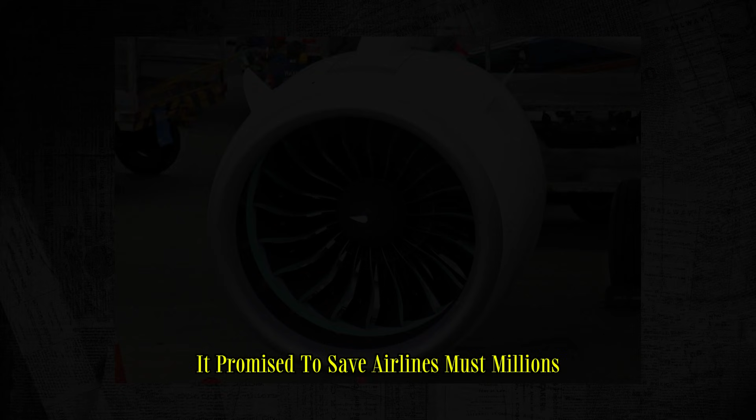What they came up with was brilliant, a revolutionary design called the Geared Turbofan. It promised to save airlines millions, cut emissions dramatically, and usher in a new era of quiet, efficient flight. They called it the PW1000G, and it represented a $10 billion bet on the future of aviation.

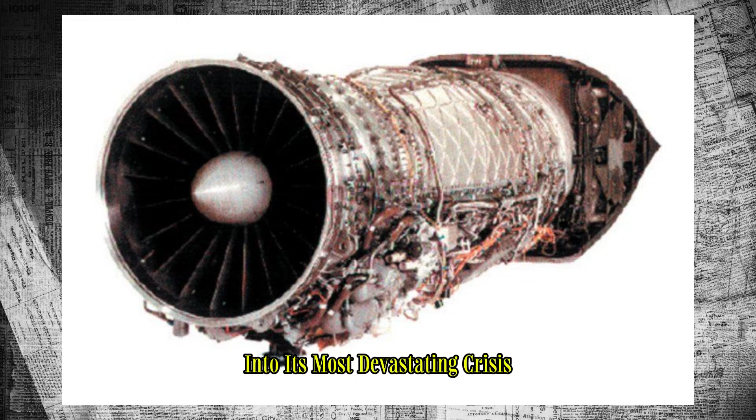But hidden within this engineering marvel was a microscopic flaw, a contamination so small you could barely see it, yet powerful enough to ground hundreds of aircraft, push airlines into bankruptcy, and turn Pratt and Whitney's greatest triumph into its most devastating crisis. To understand how everything went so catastrophically wrong, we need to go back to where it all began.

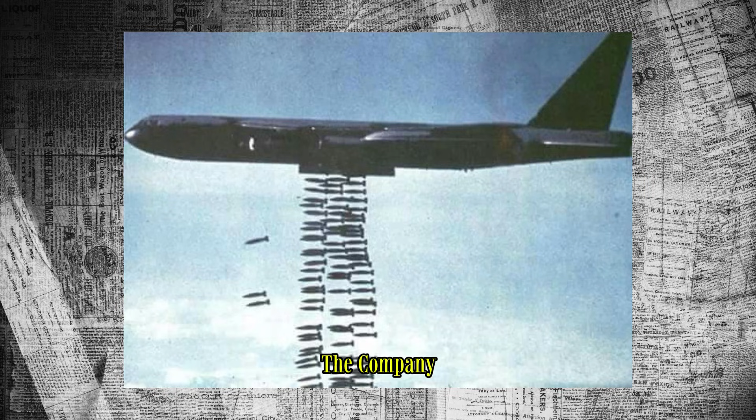By the early 2000s, Pratt and Whitney was facing an existential crisis. The company that had once powered half the aircraft in World War II, that had created the legendary J-57 engine for the B-52 bomber, and the commercial jets that started the jet age, was watching its market share erode year by year.

Airlines were choosing engines from CFM International, a joint venture between General Electric and France's Safran. Their CFM56 engine had become the workhorse of commercial aviation, powering thousands of Boeing 737s and Airbus A320 aircraft. Pratt and Whitney desperately needed to innovate, but jet engine technology had reached a plateau.

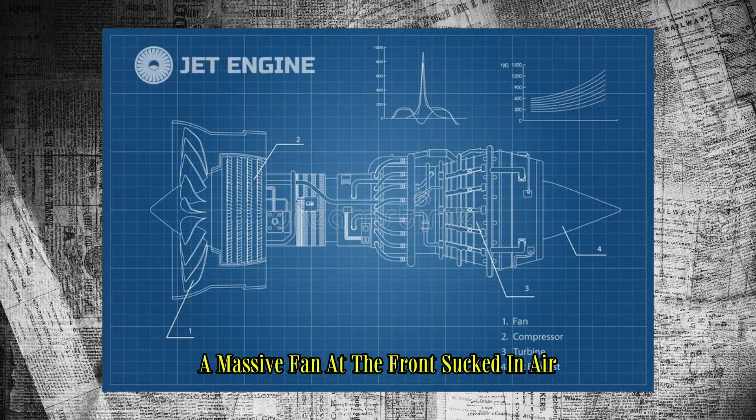Conventional turbofans all worked the same way. A massive fan at the front sucked in air, most of which bypassed the engine core to provide thrust, while a smaller portion went through the compressor, combustion chamber, and turbine.

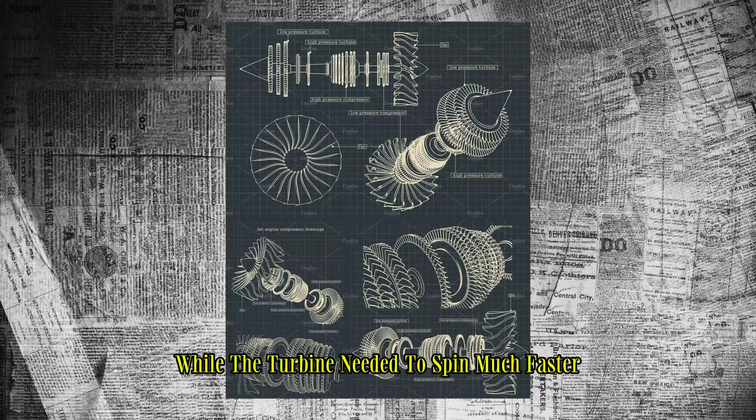The problem was physics. In a traditional turbofan, a single shaft connected the fan to the low-pressure turbine, forcing them to spin at the same speed. But here's the catch: the fan worked most efficiently at lower speeds, while the turbine needed to spin much faster. Engineers were trapped in a compromise, unable to optimize both components simultaneously.

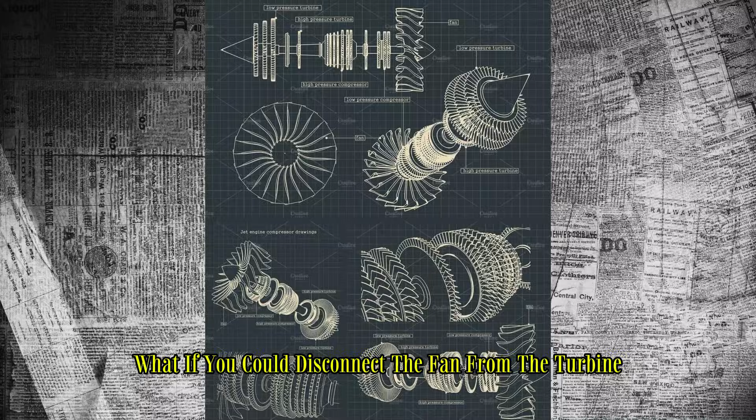Pratt and Whitney's solution was audacious. What if you could disconnect the fan from the turbine using a gearbox, allowing each to spin at its optimal speed? The concept wasn't entirely new. Small business jet engines had used these geared fans for decades, but no one had ever successfully scaled the technology to the massive engines needed for commercial airliners.

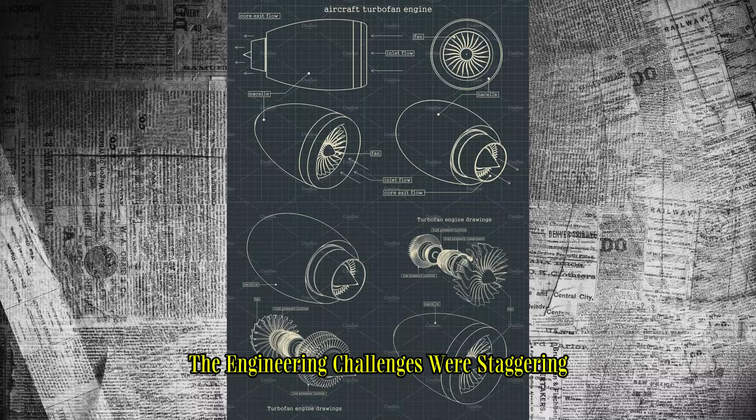The engineering challenges were staggering. You'd need a gearbox capable of transmitting 30,000 horsepower, more power than 30 Formula One race cars combined, while weighing as little as possible and operating flawlessly for tens of thousands of flight hours without maintenance. Most engineers thought it was impossible.

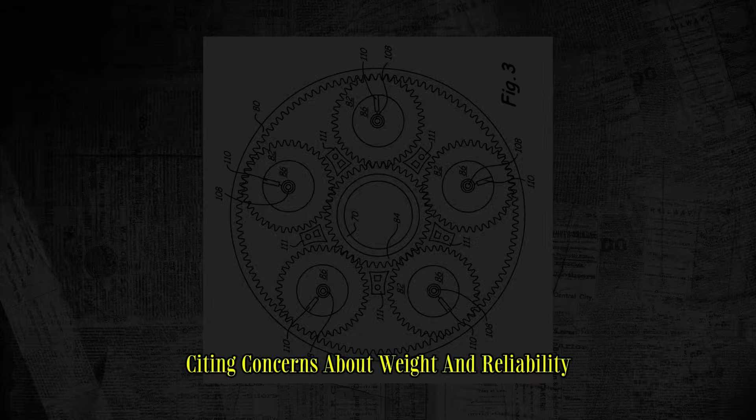General Electric and CFM looked at geared turbofan technology and walked away, citing concerns about weight and reliability. They believed the risks outweighed the benefits. But Pratt and Whitney saw an opportunity.

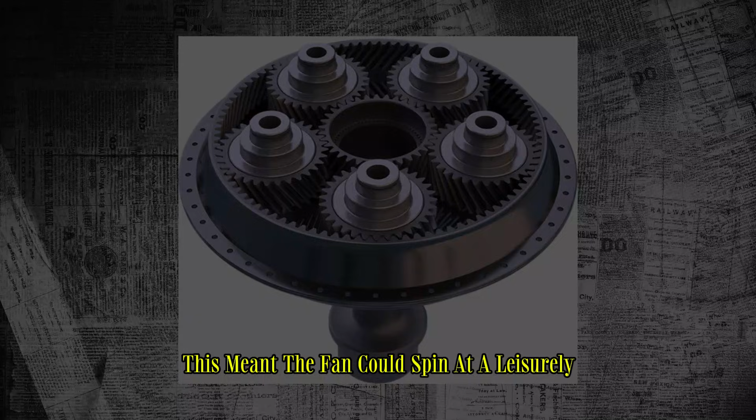Led by a team of brilliant engineers, they spent years developing what they called the fan drive gear system, a planetary gearbox with only 7 moving parts that could reduce the fan speed by a ratio of 3:1. This meant the fan could spin at a leisurely 4,000 to 5,000 revolutions per minute, while the low-pressure turbine screamed along at 12,000 to 15,000 RPM, and the high-pressure core reached over 20,000 RPM.

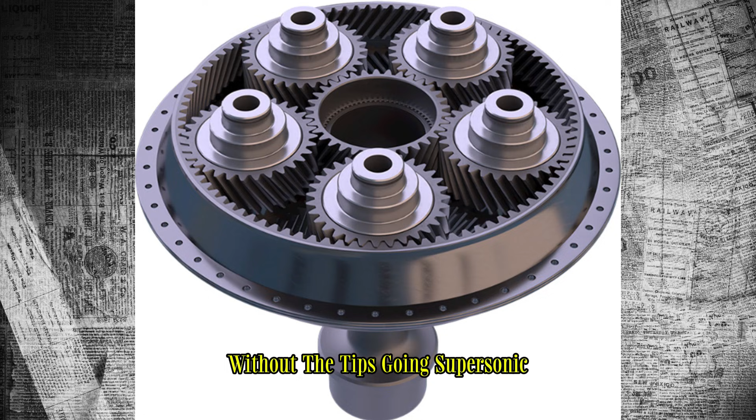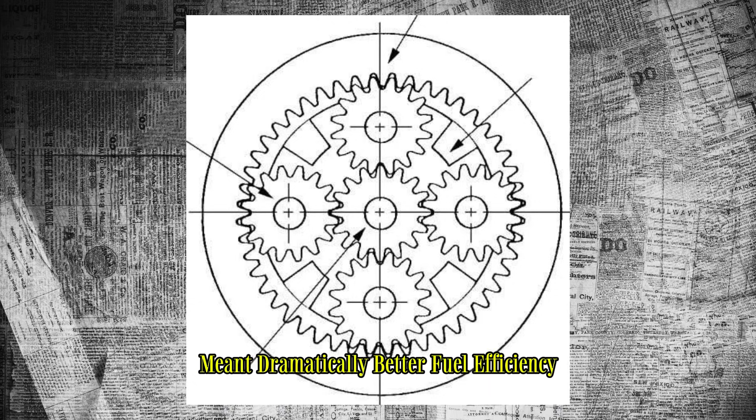The benefits were extraordinary. With the fan spinning slower, you could make it larger without the tips going supersonic, which meant you could achieve bypass ratios of 12:1 compared to 5 or 6:1 in conventional engines. More air bypassing the core meant dramatically better fuel efficiency. The slower fan tips also produced far less noise.

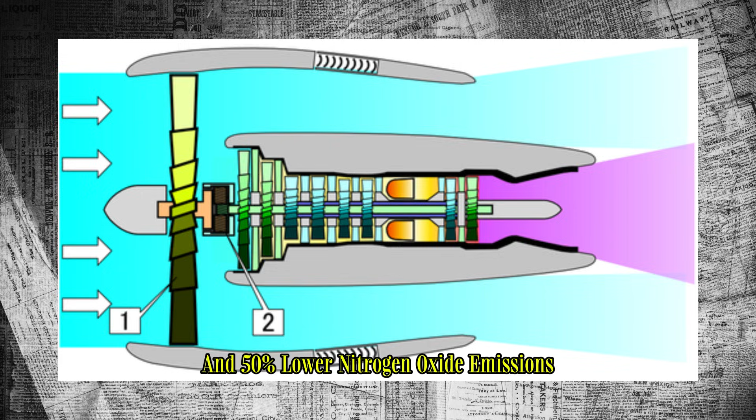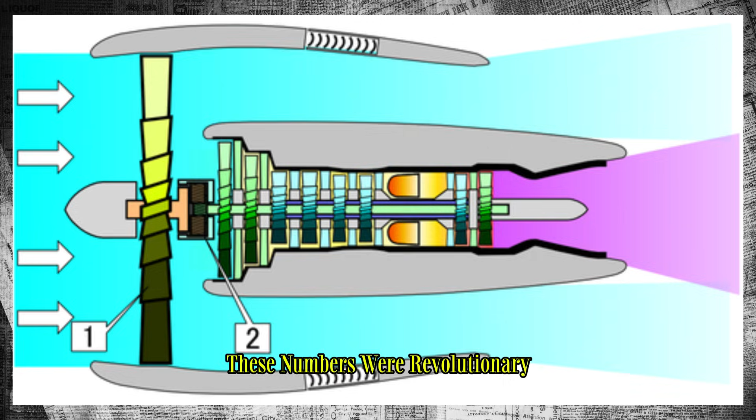Pratt and Whitney promised that the geared turbofan would deliver 16% better fuel efficiency, 75% reduction in noise footprint, and 50% lower nitrogen oxide emissions compared to previous generation engines. For airlines operating off razor-thin margins where fuel represented their single largest operating cost, these numbers were revolutionary. A single aircraft could save over $1 million in fuel costs over its lifetime.

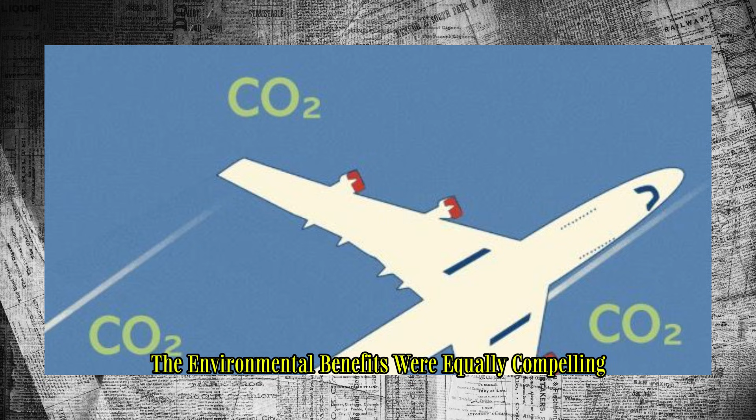Multiply that across a fleet, and you're talking about hundreds of millions of dollars in savings. The environmental benefits were equally compelling.

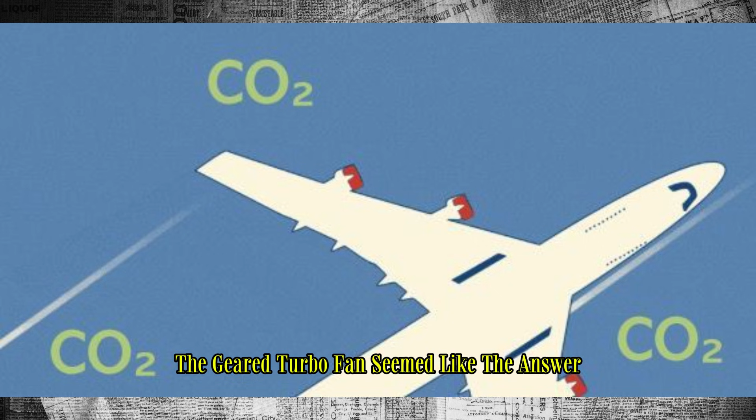Each aircraft would reduce carbon emissions by 3,000 tons per year. In an industry increasingly pressured to address its environmental impact, the geared turbofan seemed like the answer everyone had been waiting for. The first major customer came in 2006. Bombardier announced it would use Pratt and Whitney's new geared turbofan exclusively for its revolutionary C-Series airliner, later renamed the Airbus A220.

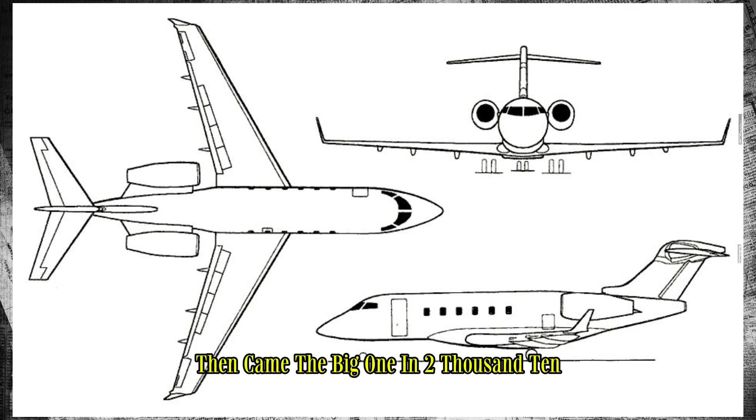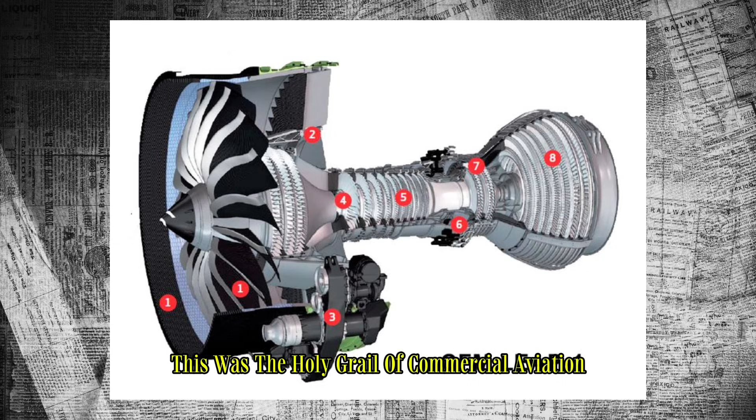Then came the big one. In 2010, Airbus announced that the PW1000G would be one of two engine options for the A320neo family, competing directly against CFM's new LEAP engine. This was the holy grail of commercial aviation.

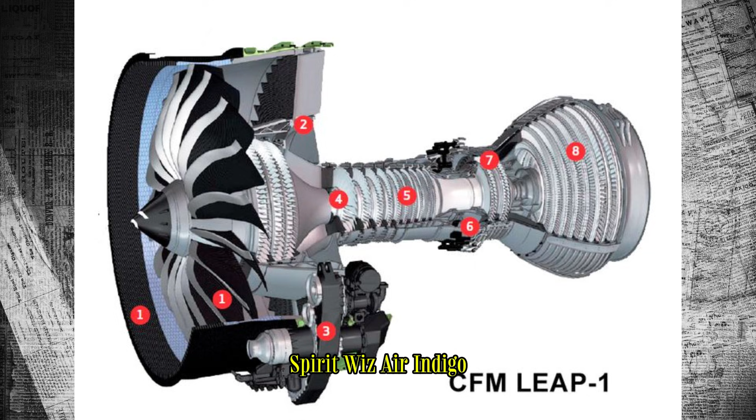Orders poured in. Embraer selected the geared turbofan for its E-Jet E2 regional jets. Airlines like JetBlue, Spirit, Wizz Air, Indigo and Go First committed to hundreds of aircraft. By the time the first engines entered service in 2016, Pratt and Whitney had spent $10 billion on development. It was the biggest bet in the company's history.

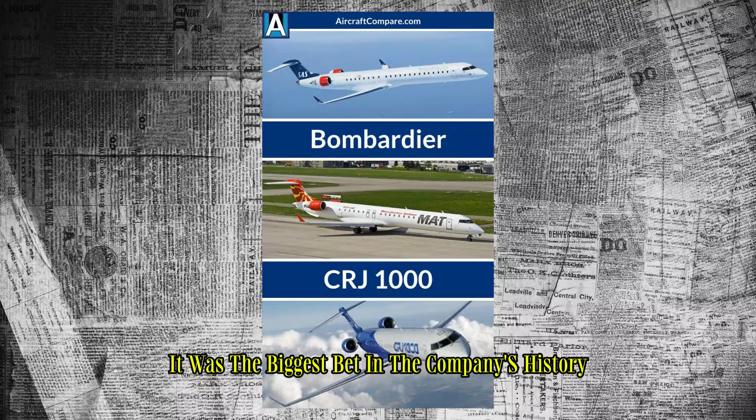The first PW1000G engines entered service in 2016 on the Bombardier C-Series. Pilots loved the quiet operation and smooth performance. Airlines appreciated the fuel savings. The technology worked exactly as promised, at least initially.

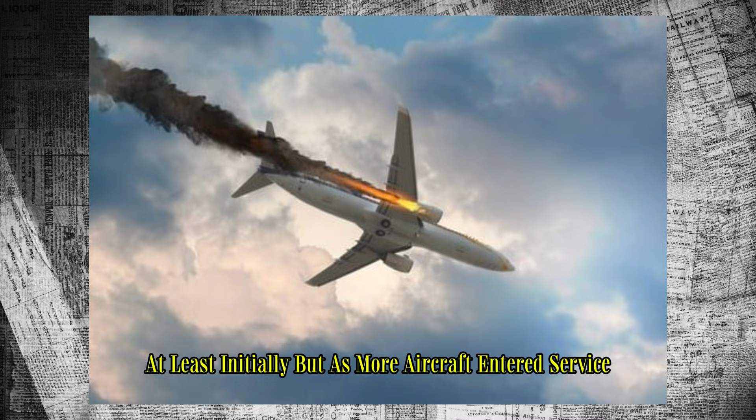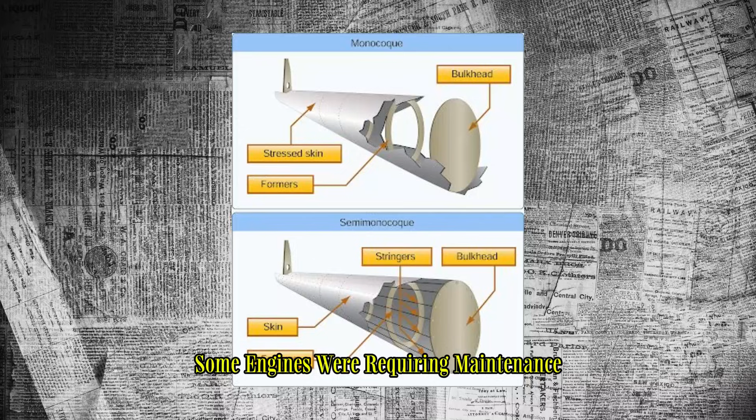But as more aircraft entered service and accumulated flight hours, cracks began to appear, literally. Airlines started reporting unexpected engine issues. Some engines were requiring maintenance far earlier than anticipated. There were problems with the combustor liners, issues with turbine blades, and troubling vibrations in certain operating conditions.

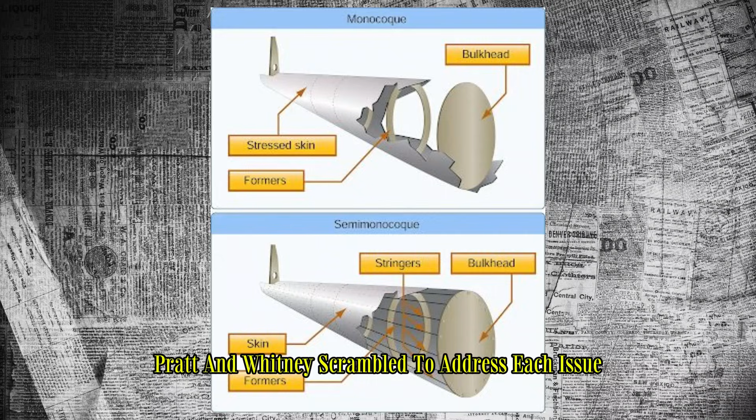Pratt and Whitney scrambled to address each issue, releasing software updates, component redesigns, and new maintenance procedures. The problem seemed manageable, typical teething issues for a new engine program.

But in July 2023, everything changed. Pratt and Whitney made a stunning announcement. They were ordering a massive recall affecting potentially 1,200 engines, roughly 40% of the entire PW1000G fleet. The reason? Contaminated powdered metal.

Here's where the story gets truly shocking. Modern jet engines use incredibly advanced materials to withstand the extreme temperatures and stresses inside the engine core. Some critical components, including high-pressure turbine discs, are manufactured using a process called powder metallurgy.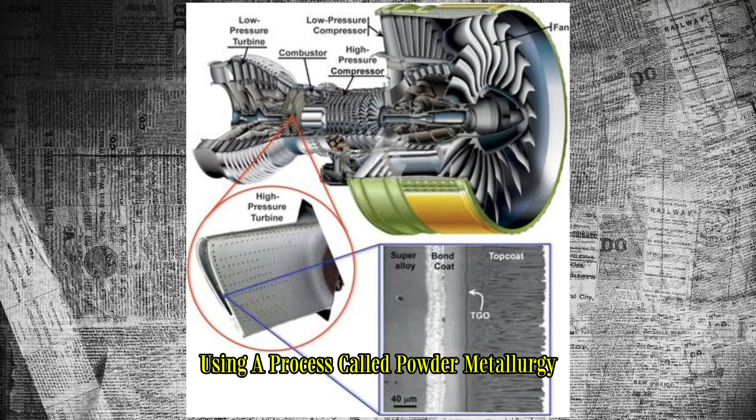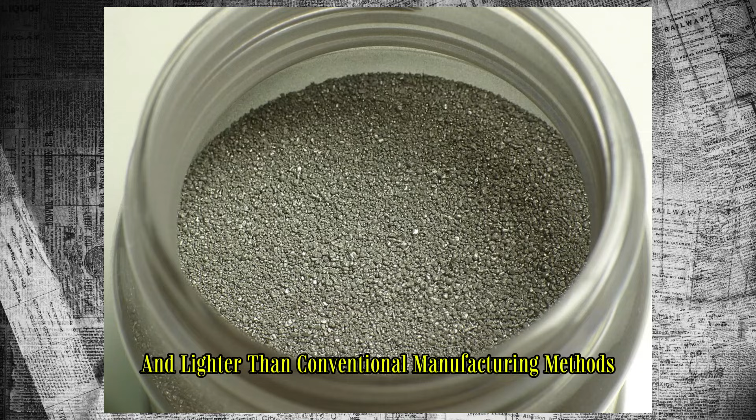Instead of casting or forging solid metal, manufacturers create a fine metal powder, compress it into shape, and then heat it until the particles fuse together. This process allows for precise control over the material's properties and can create components stronger and lighter than conventional manufacturing methods. But the process has one critical requirement.

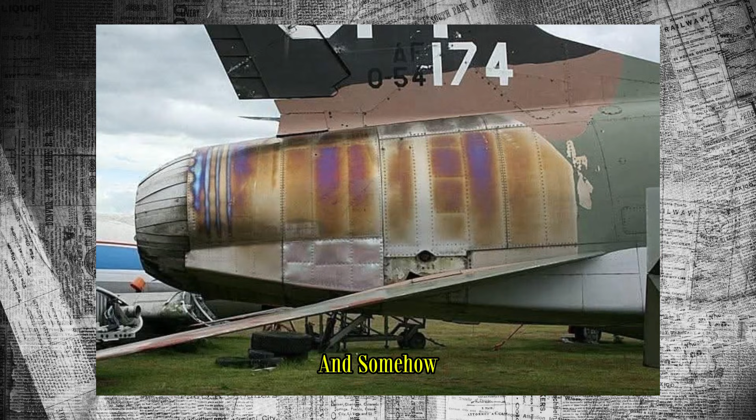The metal powder must be absolutely pure. Even microscopic contamination can create weak points in the final component. And somehow, somewhere in Pratt and Whitney's supply chain, contaminated powder made it into production.

Between late 2015 and mid-2021, an unknown quantity of PW1000G engines were built with compromised components. The contamination was so small it was nearly invisible, but under the immense stresses of operating inside a jet engine, these impurities became cracks. The cracks grew with each flight cycle, weakening critical rotating components spinning at thousands of RPM.

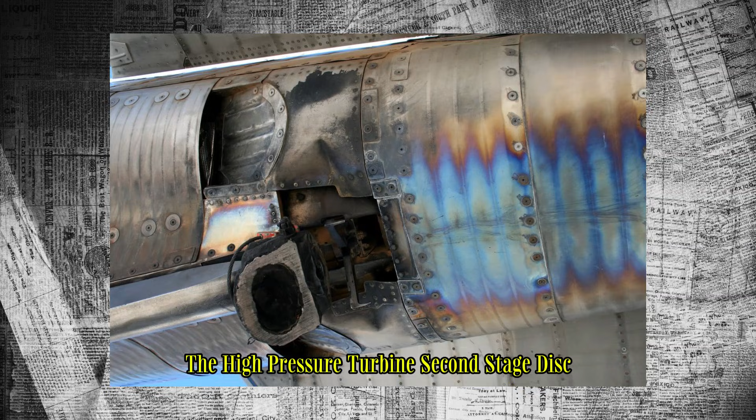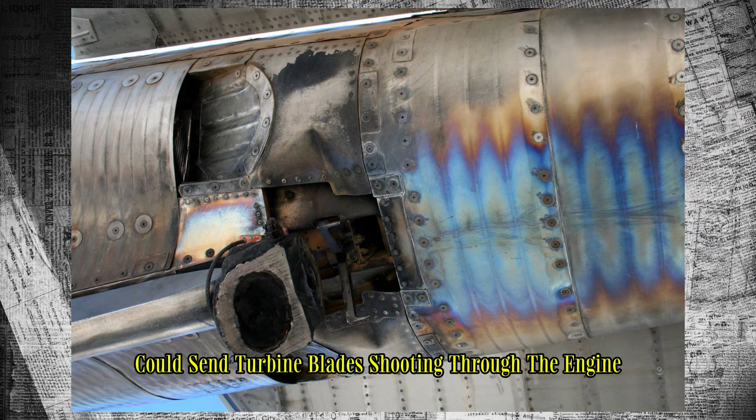The affected parts included the high-pressure turbine first and second stage hubs, the high-pressure turbine second stage disc, and the high-pressure compressor 8th stage disc. These weren't peripheral components, these were the heart of the engine, parts that if they failed catastrophically, could send turbine blades shooting through the engine cowling or even the fuselage.

The safety implications were terrifying. Pratt and Whitney had no choice but to order immediate inspections of every potentially affected engine.

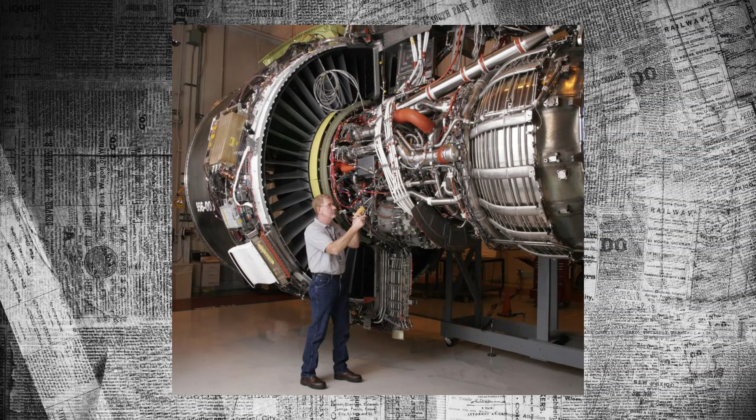But here's where the crisis became a catastrophe. The inspections weren't simple. You couldn't just look at the engine while it was attached to the aircraft. The entire engine had to be removed, shipped to a specialized maintenance facility, completely disassembled, and thoroughly inspected using advanced imaging techniques. If contaminated parts were found, they had to be replaced with new components.

The process took between 250 and 300 days, nearly a year per engine. Think about what that means. An airline with 80 aircraft, each with 2 engines, suddenly learned that 40 or 50 or 60 of those engines might need to be removed from service for up to a year.

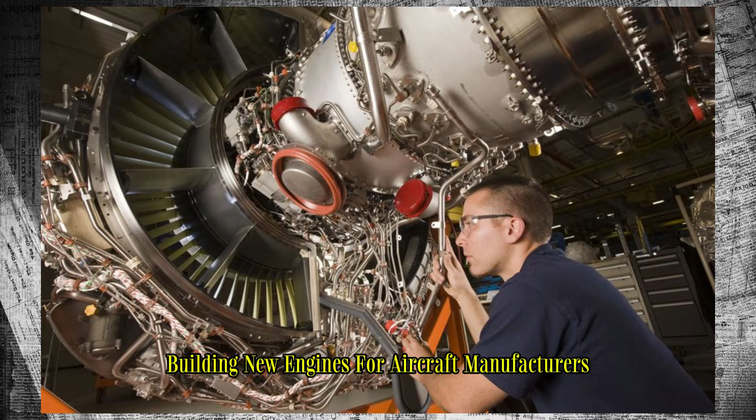With spare engines in short supply and Pratt and Whitney's production capacity already stretched thin building new engines for aircraft manufacturers, airlines faced an impossible situation. They had to park perfectly good aircraft because the engines were sitting in maintenance shops halfway around the world.

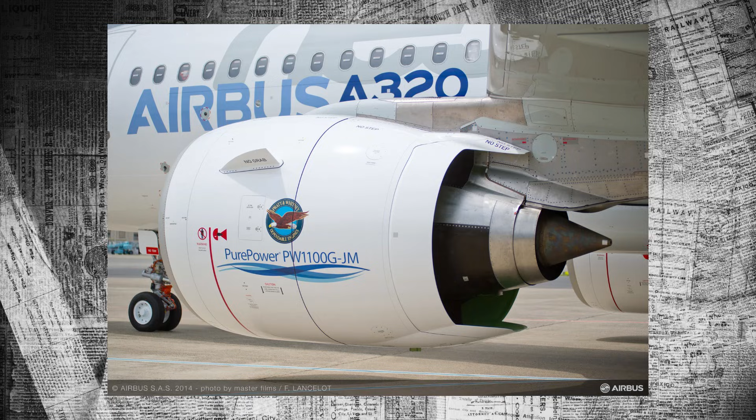The impact was immediate and devastating. By early 2024, over 600 aircraft were sitting idle in storage, representing nearly one-third of the entire geared turbofan fleet.

Compare that to CFM's competing LEAP engine, where fewer than 90 aircraft were in storage, less than 3% of that fleet. The disparity was staggering and damning.

Some airlines were hit harder than others. Low-cost carriers like Spirit Airlines, Wizz Air, Go First and Indigo had bet heavily on the fuel-efficient geared turbofan to keep their operating costs competitive. Now they watched, helplessly, as their fleets dwindled.

Spirit Airlines, once one of America's most aggressive budget carriers, had planned for 7 aircraft to be grounded through the end of 2023. Instead, they had an average of 20 grounded at any given time in 2024, with projections suggesting that number could triple.

The financial pressure was crushing. Spirit was burning through cash, unable to fly enough routes to cover its fixed costs. The company tried everything: negotiating compensation packages with Pratt and Whitney, seeking emergency financing, cutting routes, and laying off staff.

Nothing worked. In November 2024, Spirit filed for Chapter 11 bankruptcy protection, citing the Pratt and Whitney engine crisis as a major factor. They emerged from bankruptcy in March 2025, touting a lighter debt load and a sustainable path forward.

But the reprieve lasted only months. In August 2025, Spirit filed for bankruptcy again, this time facing an even more dire situation. Lease agreements were terminated, creditors were circling, and the airline's very survival hung in the balance.

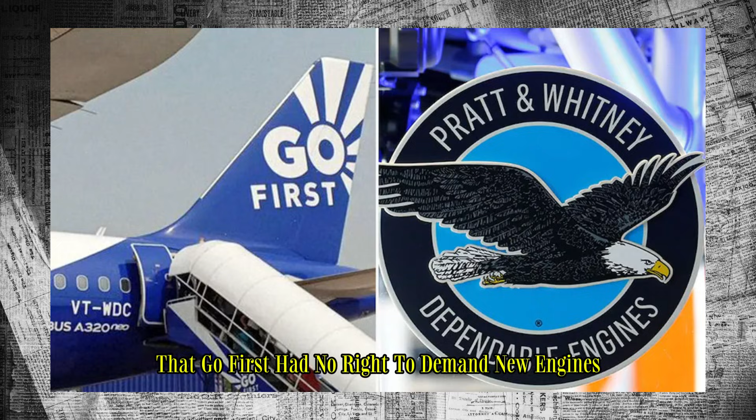The airline filed for bankruptcy in May 2023, explicitly blaming Pratt and Whitney for the crisis. In court filings, Go First claimed that Pratt and Whitney had failed to provide adequate spare engines as required by their agreements. Pratt and Whitney fired back, arguing that Go First had no right to demand new engines because the aircraft leases had been terminated due to Go First's own financial mismanagement.

The legal battle became nasty, with billions of dollars at stake. But the arguments didn't matter to the thousands of employees who lost their jobs, or the passengers left stranded when Go First suspended all operations. By mid-2023, the airline was finished, another casualty of the geared turbofan crisis.

Other airlines faced similar nightmares. JetBlue expected to have an average of 11 A320neo family jets grounded at any time throughout 2024. Wizz Air, Europe's fastest-growing ultra-low-cost carrier, had dozens of aircraft parked. Indigo, India's largest airline, watched its ambitious expansion plans evaporate as more and more aircraft sat idle. Even Air Baltic, which operated a small fleet of A220 aircraft, had half its planes grounded at one point.

The human cost was staggering. Tens of thousands of jobs disappeared. Pilots who had trained for years found themselves furloughed. Flight attendants, mechanics, and ground crew joined unemployment lines.

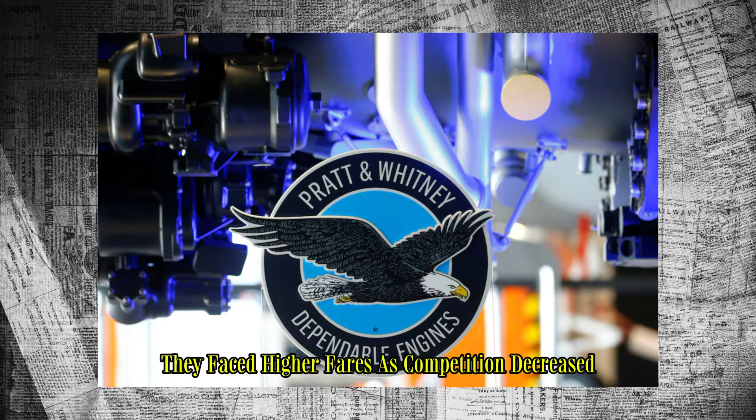Small airports that depended on these budget carriers for connectivity saw service reduced or eliminated entirely. And passengers? They faced higher fares as competition decreased, fewer flight options, and the constant uncertainty of whether their airline would survive long enough to honour their tickets.

But the crisis wasn't just about the airlines. Pratt and Whitney itself was bleeding. The company set aside a $3 billion charge to cover recall costs, but that was just the beginning. They had to compensate airlines for lost revenue, provide interim credits, and somehow ramp up both production of new engines for aircraft manufacturers and maintenance capacity for the recall.

The company's reputation, built over nearly a century of engineering excellence, lay in tatters. Parent company RTX, formerly Raytheon Technologies, saw its stock price hammered as investors worried about the long-term implications.

The recall was initially expected to peak in early 2024 and gradually wind down. Instead, the problem kept growing. By late 2025, over 835 aircraft were in storage, up from 748 just months earlier. The stored fleet represented 33% of all geared turbofan-powered aircraft, and industry analysts projected the crisis would extend through the end of the decade.

How could this happen? How could a company with Pratt and Whitney's pedigree allow the contaminated powder to enter production for 6 years without detection? The answers point to a perfect storm of factors.

The push to compete had created intense pressure to bring the geared turbofan to market quickly. Pratt and Whitney was burning billions of dollars, while CFM's LEAP engine was winning orders. Every delay meant lost market share. The powder metallurgy process itself was relatively new at this scale for jet engines.

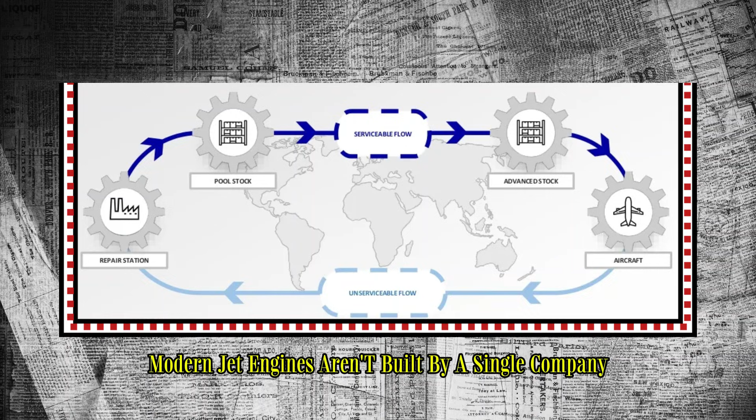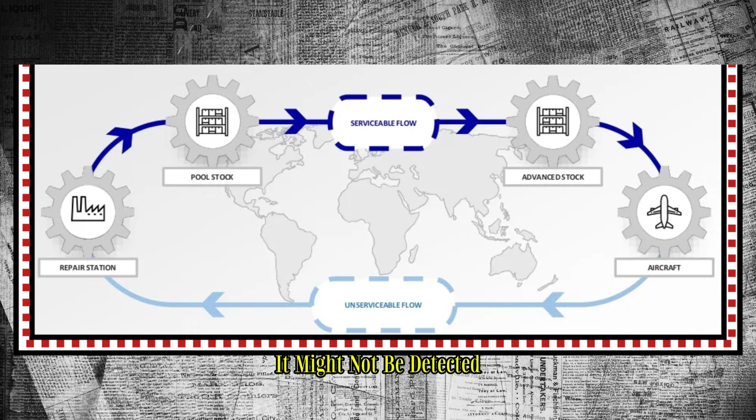Supply chain complexity also played a role. Modern jet engines aren't built by a single company. Components come from suppliers around the world, each with their own manufacturing processes. If contamination occurred at a supplier's facility, it might not be detected until components were installed in finished engines.

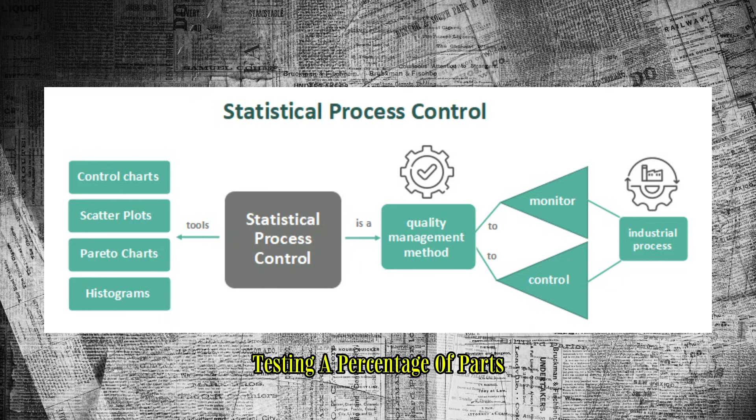Testing has limits. You can't test every component to destruction. Instead, manufacturers rely on statistical sampling, testing a percentage of parts and assuming the rest meet standards. If contamination varied from batch to batch, it could easily slip through sampling-based quality control.

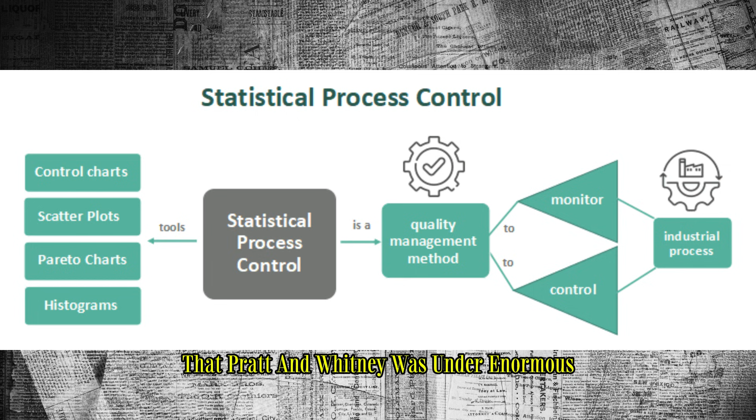There's also the uncomfortable reality that Pratt and Whitney was under enormous financial pressure from stakeholders in the market. The company had spent $10 billion developing the geared turbofan. It needed to start recouping that massive investment, which meant getting engines out the door and into service as quickly as possible. Did that pressure lead to shortcuts or overlooked warning signs? We may never know the full story.

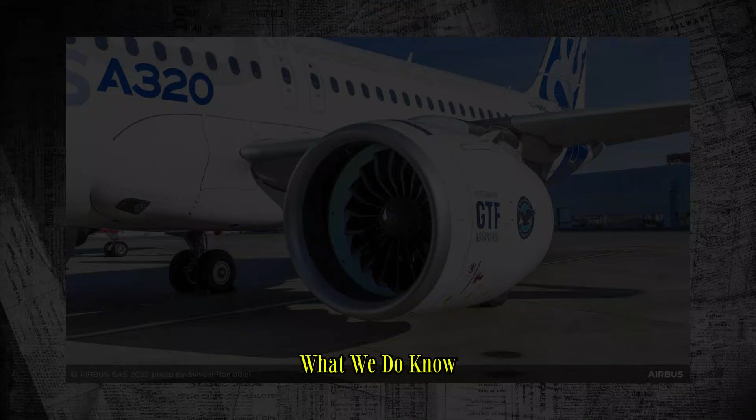What we do know is that the consequences have been catastrophic, not just for Pratt and Whitney, but for the entire commercial aviation industry. So where do things stand now?

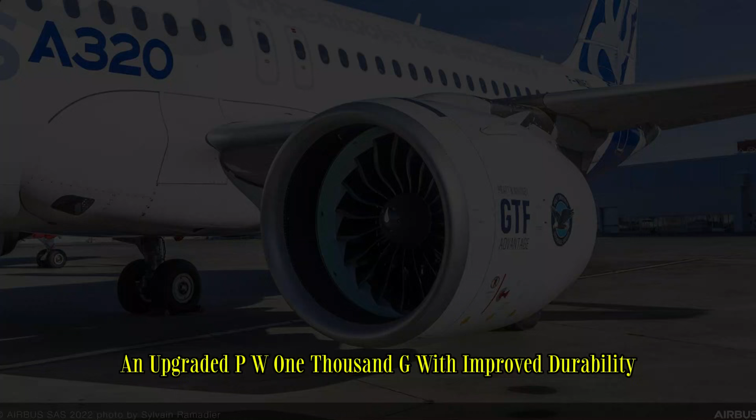Pratt and Whitney insists it has turned the corner. The company has expanded its maintenance capacity by 40%. It's introduced the GTF Advantage, an upgraded PW1000G with improved durability, which began production in late 2025. The company is also rolling out a Hot Section Plus upgrade package, replacing 35 components in existing engines with improved versions. These upgrades are supposed to address the durability issues.

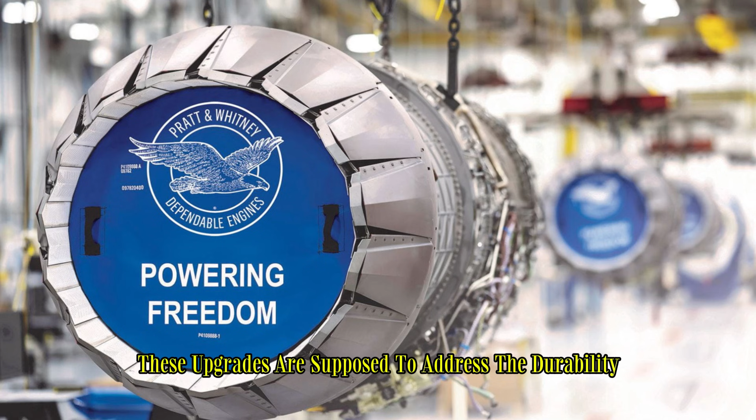The company projects that by the end of 2026, it will complete the bulk of the recall work. Full recovery should come by the end of the decade.

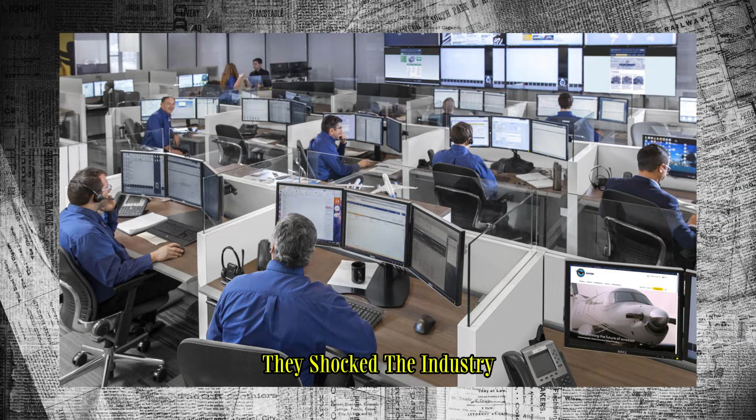But airlines have learned painful lessons about trust. When United Airlines, a major Pratt and Whitney customer historically, placed an order for Airbus A321neo aircraft, they shocked the industry by selecting Pratt and Whitney engines even after watching the recall unfold. Some analysts saw it as a vote of confidence, a sign that the problems had been fixed. Others saw it as a calculated gamble, betting that Pratt and Whitney's desperation to rebuild its reputation would result in better pricing and support. Time will tell which interpretation is correct.

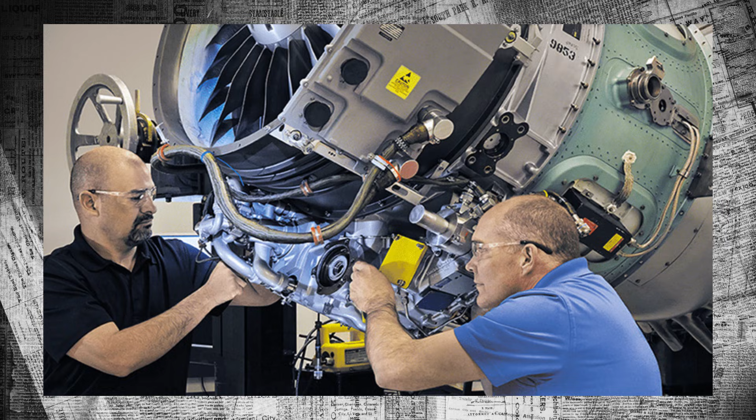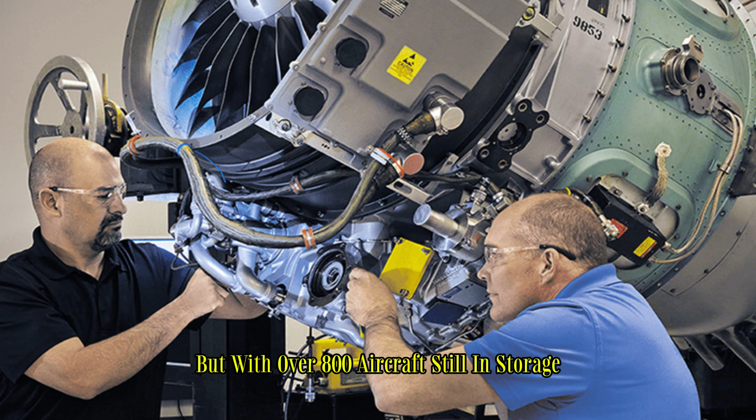For the airline still suffering through the crisis, the pain continues. As of late 2025, Pratt and Whitney had delivered about 1,000 new engines that year, a 6% increase from the previous year. But with over 800 aircraft still in storage and more requiring maintenance each month, it's a race against time.

Spirit Airlines, after its second bankruptcy filing, reached a settlement with Pratt and Whitney affiliates for up to $140 million in compensation. The airline is now trying to restructure around a much smaller fleet, keeping only 10 to 28 A320neo aircraft while divesting the rest. It's a shadow of its former ambitions, a company that once dreamed of national domination now fighting just to survive.

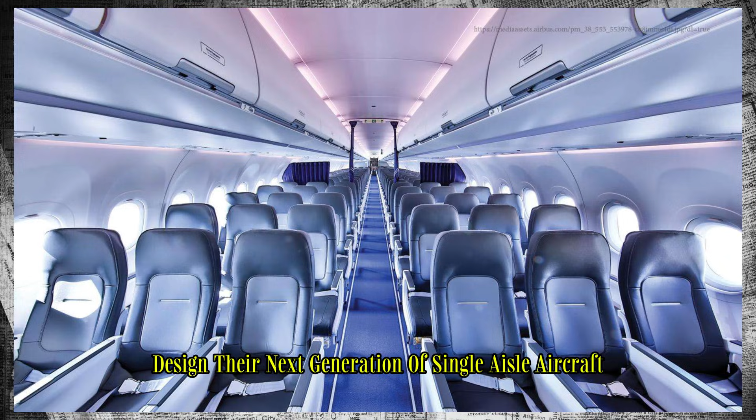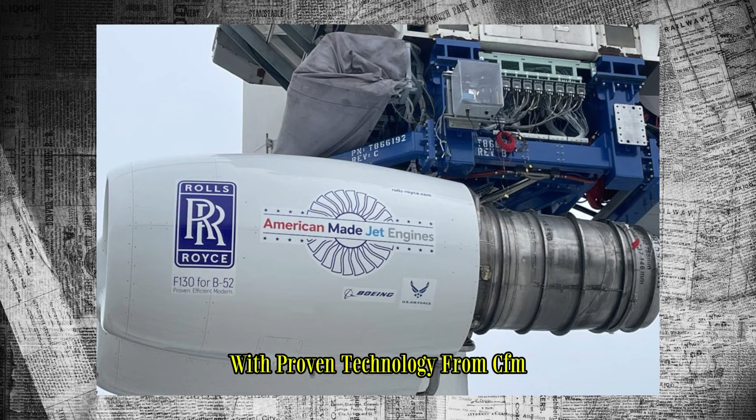The broader industry has drawn its own conclusions. When Airbus and Boeing design their next generation of single-aisle aircraft, expected to enter service in the early 2030s, engine selection will be critical. Will airlines trust Pratt and Whitney's next innovation? Or will they play it safe with proven technology from CFM or Rolls-Royce? The scars from the PW1000G crisis run deep.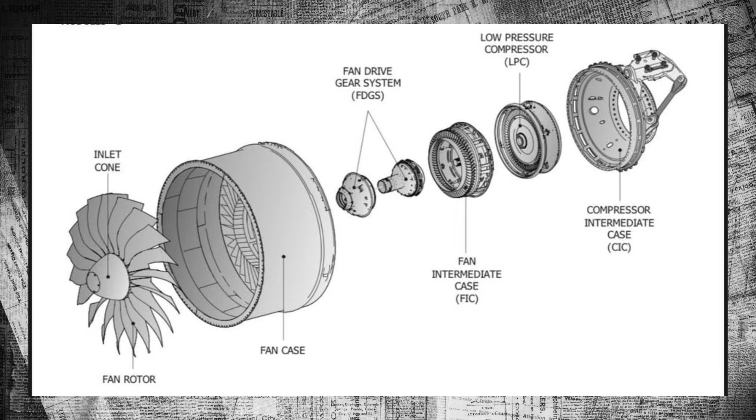There's a bitter irony in all of this. The geared turbofan technology itself works beautifully. When the engines are running properly, they deliver exactly what was promised: exceptional fuel efficiency, dramatically reduced noise and lower emissions. Pilots and passengers love the smooth, quiet operation. The engineering breakthrough was real and revolutionary.

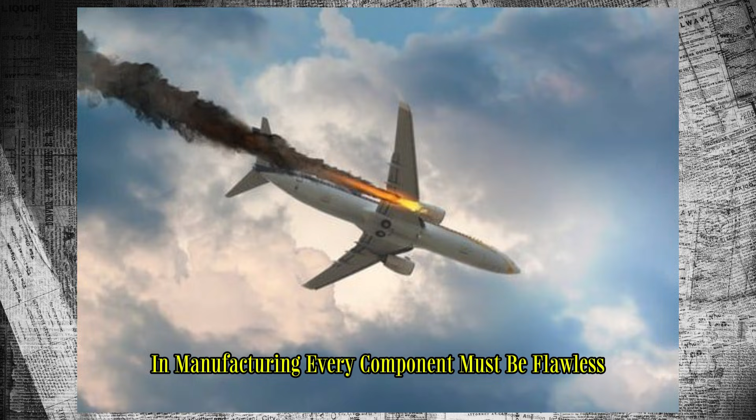What failed wasn't the fundamental design but the execution, specifically the manufacturing quality control that allowed contaminated materials to enter production. It's a reminder that in aerospace, where safety is paramount and margins for error are measured in microns, excellence in design means nothing without perfection in manufacturing. Every component must be flawless because a single failure at 30,000 feet can have catastrophic consequences.

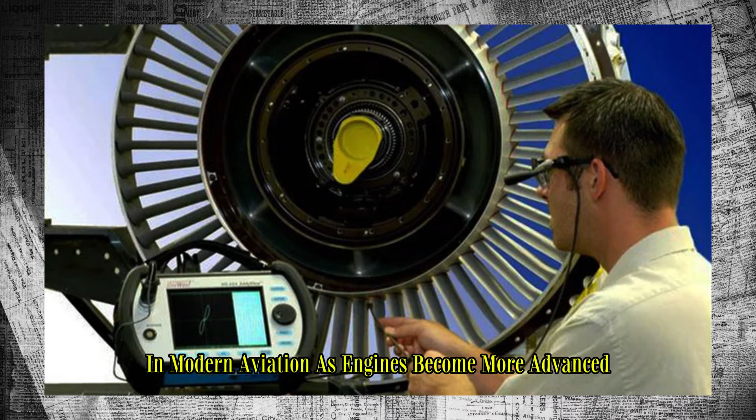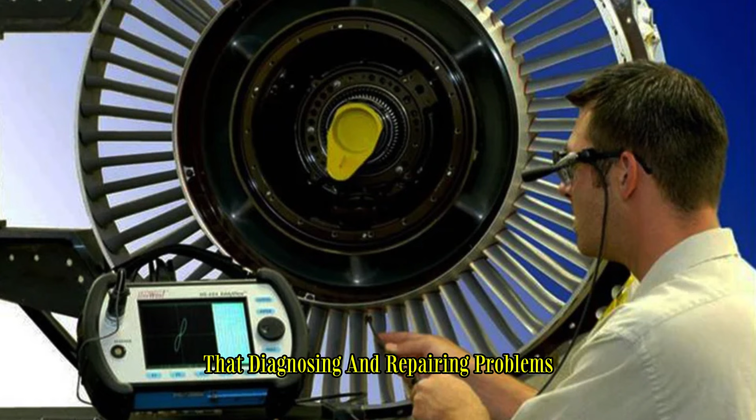The PW1000G crisis also highlights a deeper problem in modern aviation. As engines become more advanced, more efficient, and more complex, the consequences of failure become more severe. We've created systems so sophisticated that diagnosing and repairing problems requires months of work by highly trained specialists using equipment found in only a handful of facilities worldwide. When something goes wrong, you can't just swap in a spare part and keep flying.

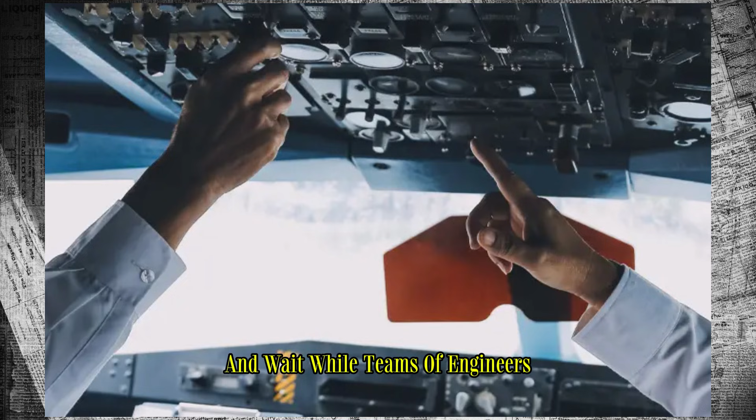You ground the aircraft, remove engines weighing several tons, ship them across continents, and wait while teams of engineers painstakingly inspect and rebuild them. This vulnerability is baked into the industry's economics. Airlines operate on thin margins and can't afford to keep large inventories of spare engines sitting idle. Manufacturers focus on maximizing production of new engines for new aircraft, rather than building up reserves for potential recalls.

When a crisis hits, the system has no slack, no buffer to absorb the shock. And what about the passengers, the people who just wanted to get from point A to point B? They paid the price in higher fares as competition decreased, in cancelled flights and disrupted travel plans, and in the uncertainty of whether their airline would still exist by the time their vacation arrived. They became collateral damage in a drama of engineering ambition, manufacturing failure, and corporate survival.

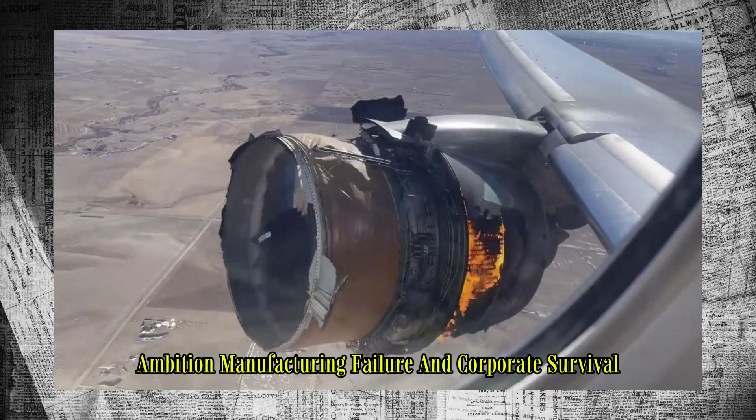Looking back, the warning signs were there. The early reliability issues, the unexpected maintenance requirements, the software patches and component redesigns all pointed to an engine program struggling with teething problems, but no one expected contaminated powder metal. No one imagined a microscopic impurity could ground a third of the fleet and push multiple airlines toward bankruptcy.

That's the terrifying thing about manufacturing at this scale and complexity. You can do everything right 99.9% of the time and still end up with a disaster.

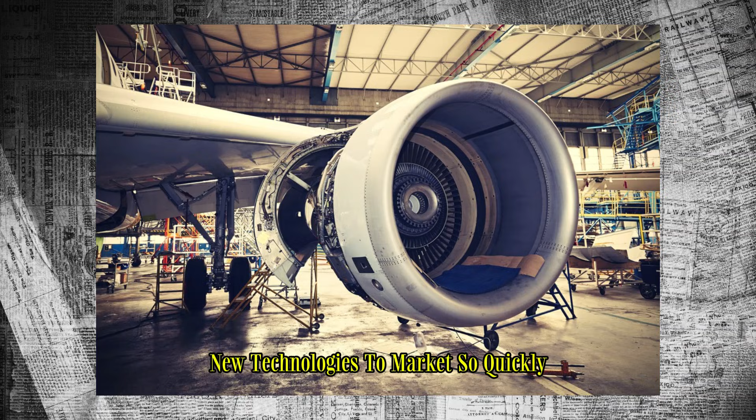As we move forward, the aviation industry faces hard questions. Should manufacturers be allowed to bring revolutionary new technologies to market so quickly, or should regulatory oversight be strengthened to catch quality control failures before they become crises? How can airlines protect themselves from supplier failures when they're locked into long-term commitments for aircraft and engines? What's the right balance between innovation and reliability in an industry where both are essential?

Pratt and Whitney is fighting for its future, working around the clock to repair its engines and its reputation. The company that Frederick Rentschler founded in 1925 with a belief in engineering excellence now faces the consequences of a failure in that very principle.

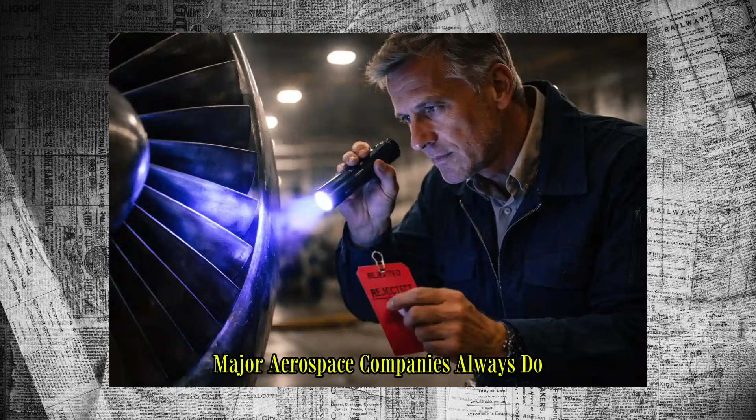They'll survive. Major aerospace companies always do. They're too important, too embedded in the industrial and military complex to simply disappear. But the Pratt and Whitney that emerges from this crisis will be different. Scarred by the experience, more cautious, more focused on quality control, and forever aware that in aviation, trust once lost is almost impossible to fully regain.

For Spirit Airlines, Go First and the other carriers pushed to the brink, there may be no happy ending. Some will emerge smaller and weaker, others won't emerge at all. Their stories serve as cautionary tales about the risks of betting everything on a single technology or supplier.

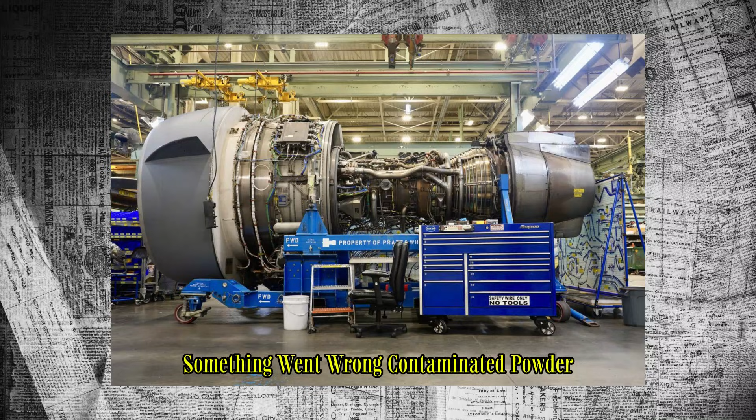And for the engineers at Pratt and Whitney who designed the geared turbofan, who believed they were creating the future of aviation, the PW1000G crisis must feel like a tragedy. Their revolutionary design worked. The technology was sound. But somewhere in the complex global supply chain that turns raw materials into precision components, something went wrong. Contaminated powder, invisible to the naked eye, defeated a $10 billion engineering masterpiece.

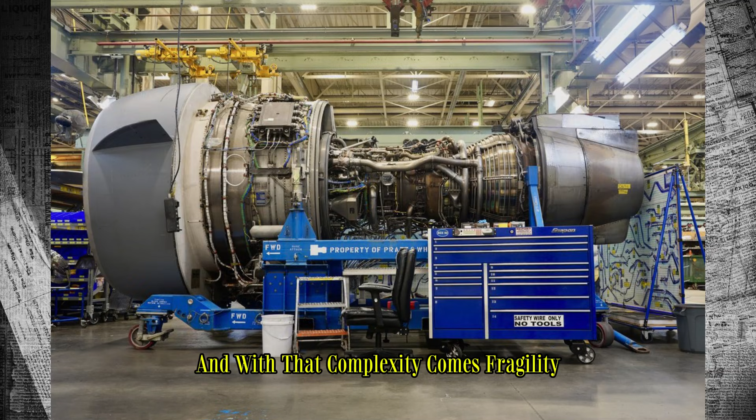That's the lesson here. In the relentless pursuit of innovation, in the race to build engines that are lighter, more efficient, and more powerful, we've created systems of staggering complexity. And with that complexity comes fragility. A single point of failure, a batch of contaminated powder, can cascade through the entire system, grounding hundreds of aircraft and costing billions of dollars.

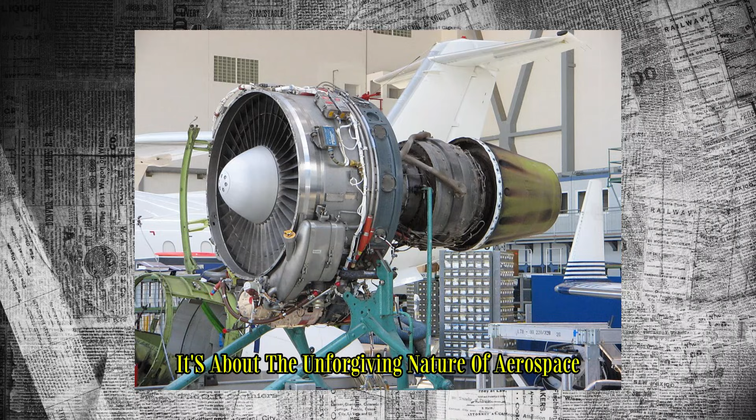The rise and fall of Pratt and Whitney's geared turbofan is a story about ambition and innovation, about technological triumph undermined by manufacturing failure. It's about the unforgiving nature of aerospace engineering, where excellence is expected and anything less can be catastrophic. Most of all, it's a reminder that even the mightiest can fall, that a company with nearly a century of aviation dominance can see its reputation shattered by impurities measured in parts per million.

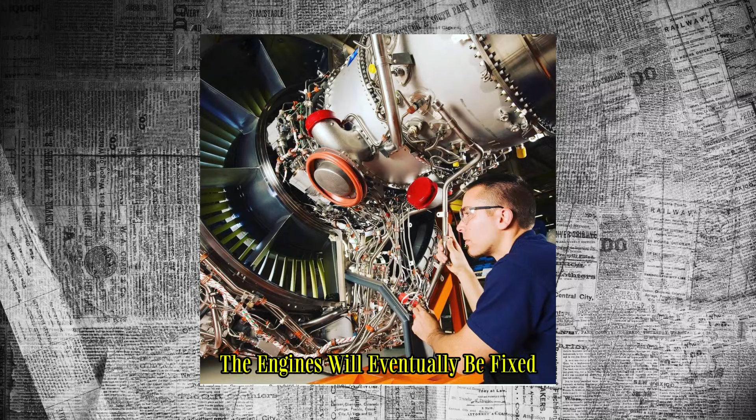The engines will eventually be fixed. Airlines will rebuild their fleets. Pratt and Whitney will recover. But the PW1000G crisis will be studied for decades as a case study in how brilliant engineering can be undone by flawed execution, how microscopic contamination can have macro consequences, and how a $10 billion bet on the future can turn into a nightmare that reshapes an entire industry.

The skies will keep flying, but they'll never quite forget the engine that promised to revolutionize aviation and instead became a cautionary tale about the perils of pushing technology too far, too fast, without the quality controls to ensure that innovation doesn't come at the cost of reliability.